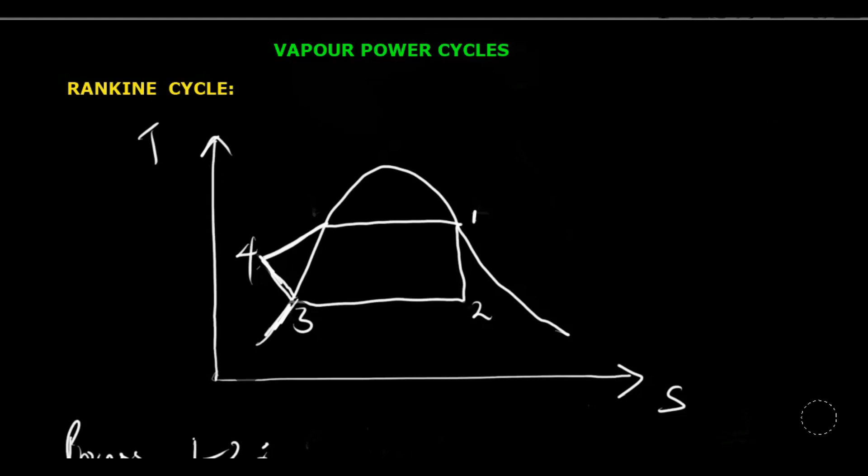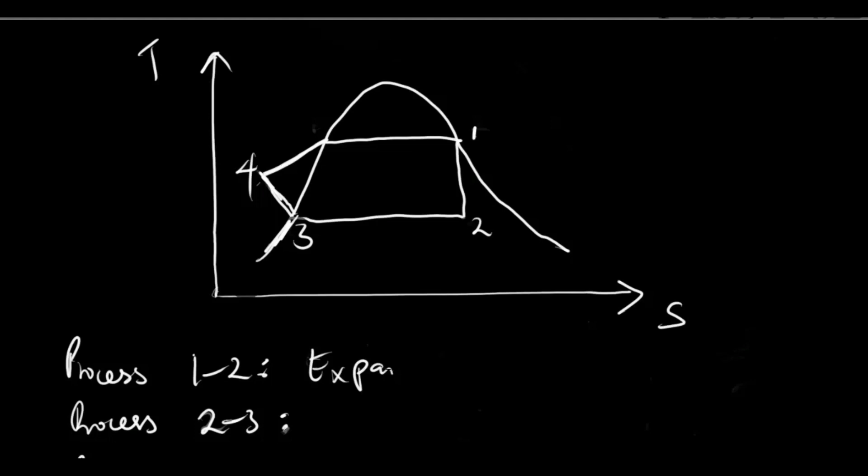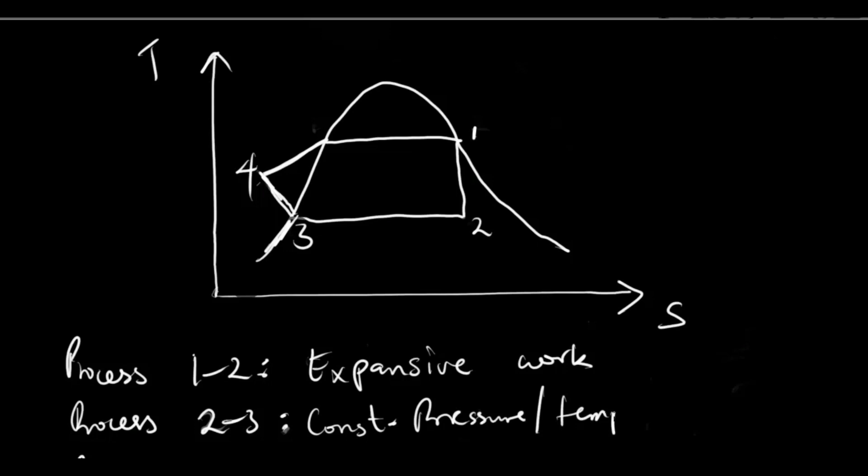So now let's go to the processes in detail. Process 1-2, that is the expansive work. Process 2 to 3 is the constant pressure and temperature heat rejection. Constant temperature and pressure heat rejection.

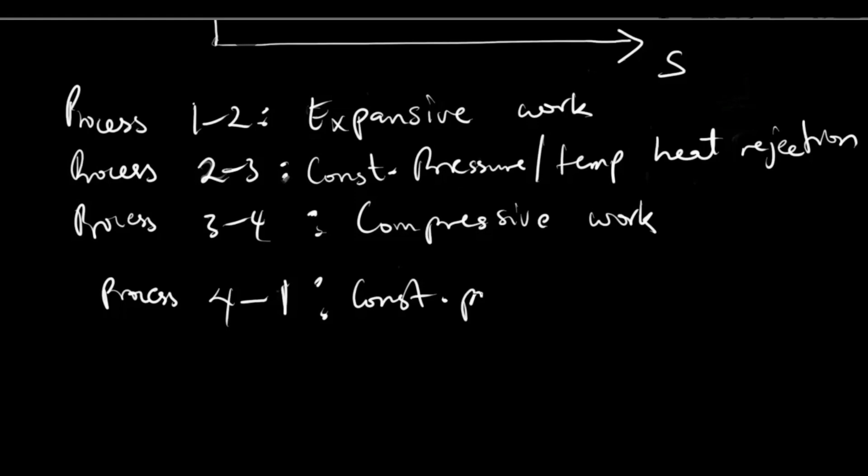Process 3 to 4 is a compressive work. Then process 4 to 1 is none other than the constant pressure and temperature heat addition.

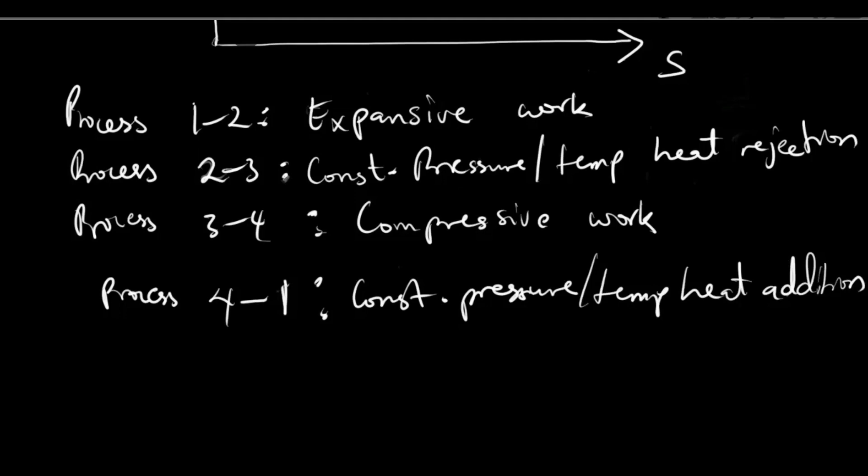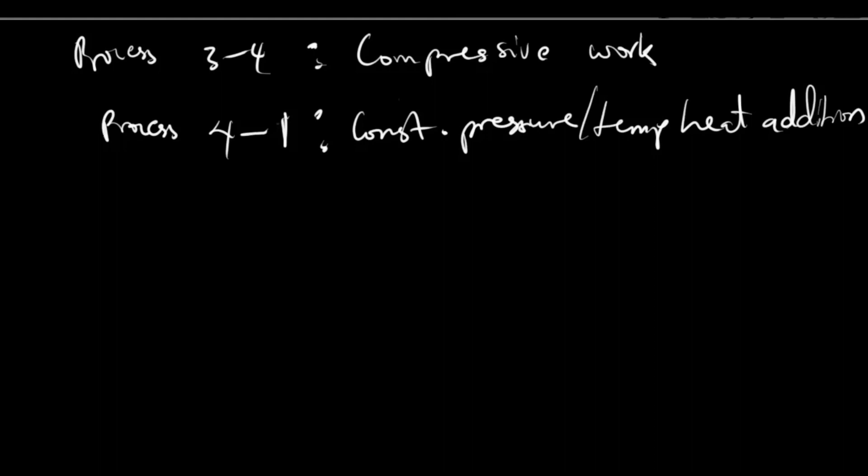Okay, now having stated this, we go straight into the formulas, though most of the formulas we have stated already in the Carnot cycle. But without mincing words, without wasting much of our time, let's still go over it shortly.

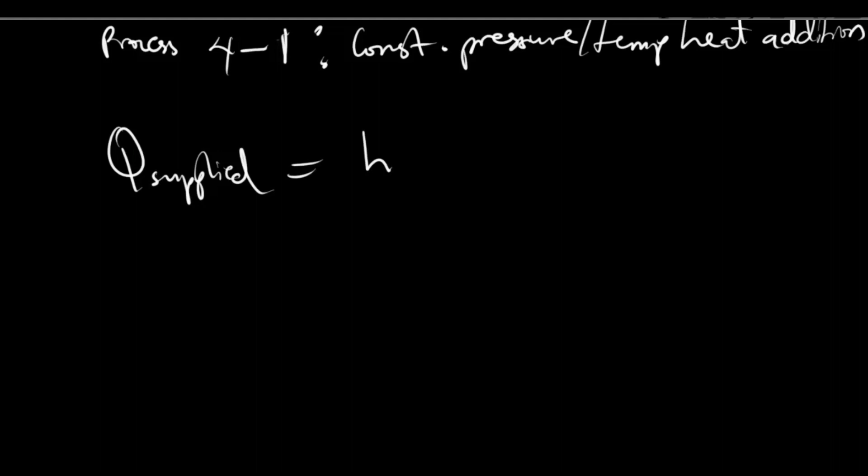So we have the heat supplied. The heat supplied QS is given by H1 minus H4, then Q loss is H2 minus H3,

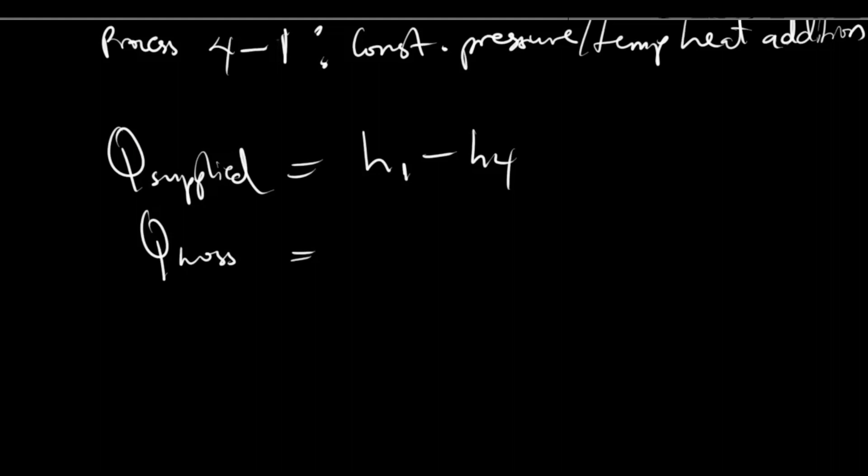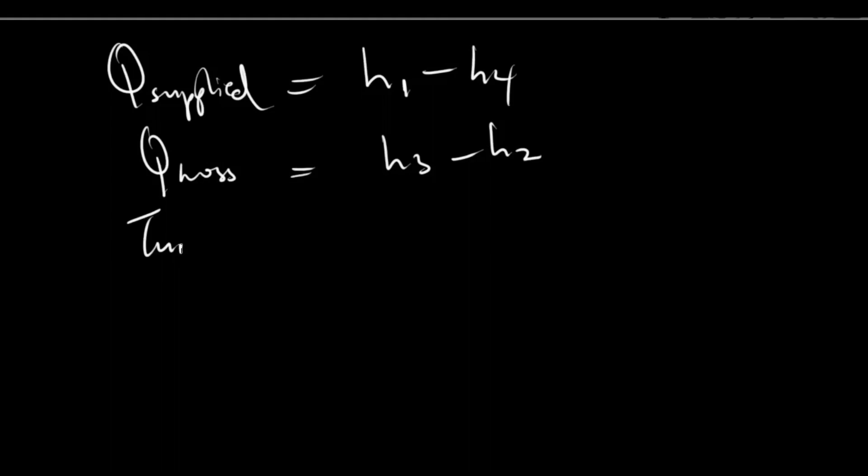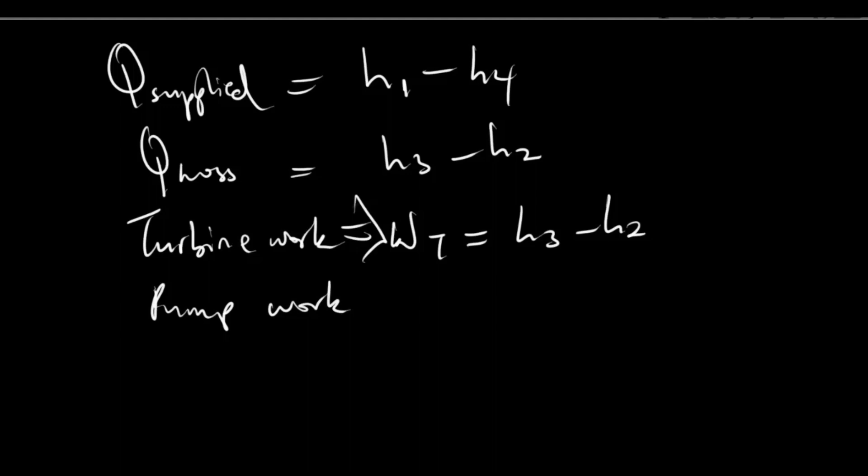turbine work, that is WT, the WT is equal to H3 minus H2, and compressive work or pump work, which is WP, is given by h4 minus h3. Rather, h4 minus h3. So this is what we'll be using.

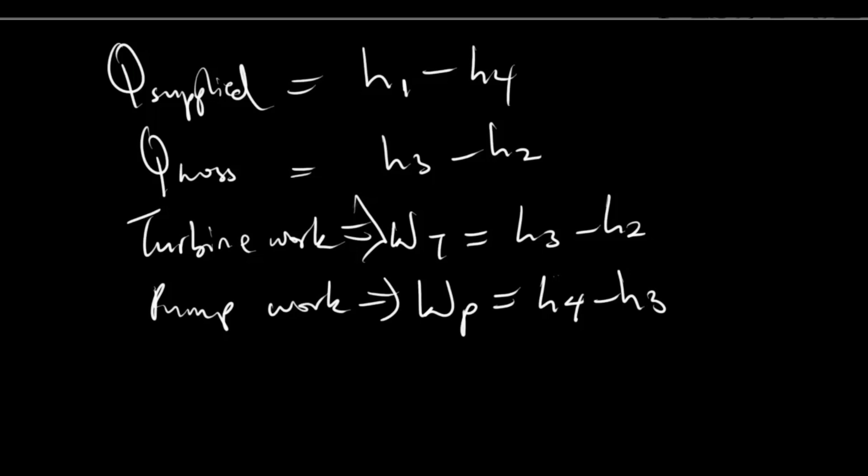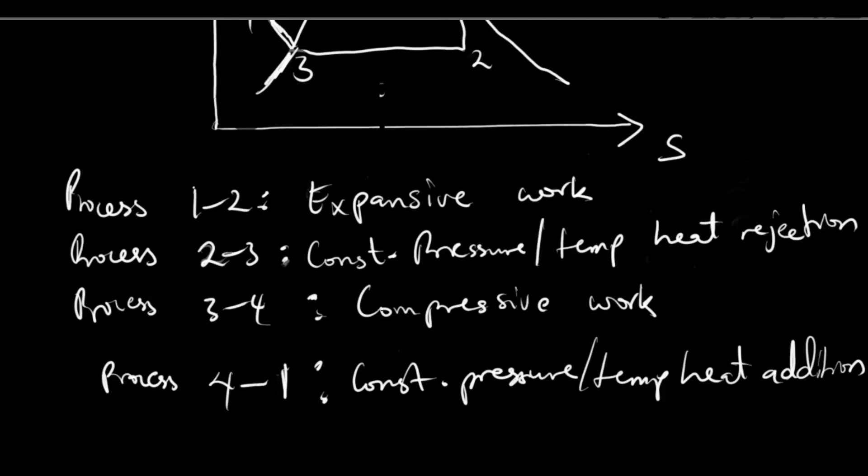Okay, now let's go down to solving a simple Rankine question that will help us understand these processes far more better.

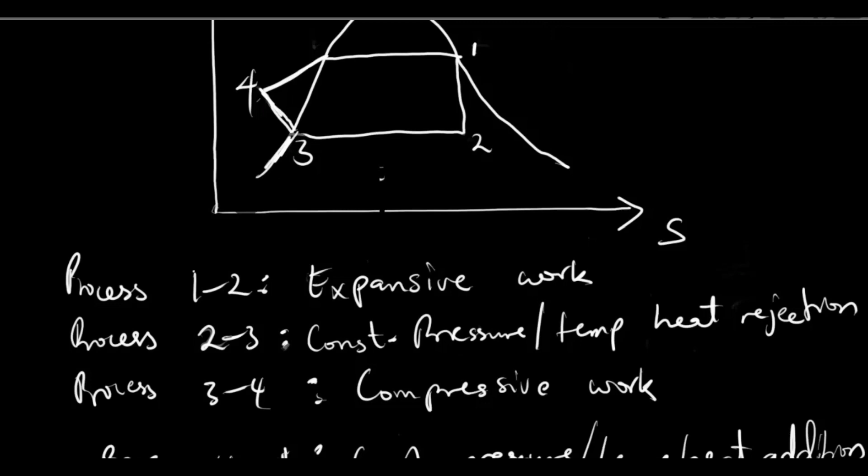So I go over here, the question. Now we have an example. Example 1: calculate the cycle efficiency, the work ratio, the specific steam consumption of a Rankine cycle working between 30 to 0.04 bar.

Now they say we should calculate. Alright, we are going to do just that. So firstly, remember, we start by writing our solution. So solution here, and our parameters given, though you don't have much of a parameter will be the graph. So we draw the graph.

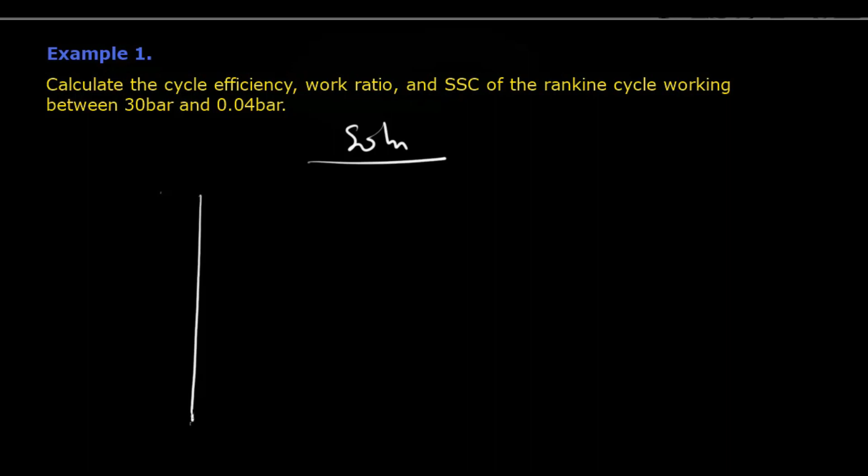There is the TS diagram, and the TS diagram goes this way. Alright, these are TS diagram. Our TS diagram is looking funny, so let's clean up this part and make it straight. Alright, yes, because it has to be straight. Okay, we have this. Good, so we have this.

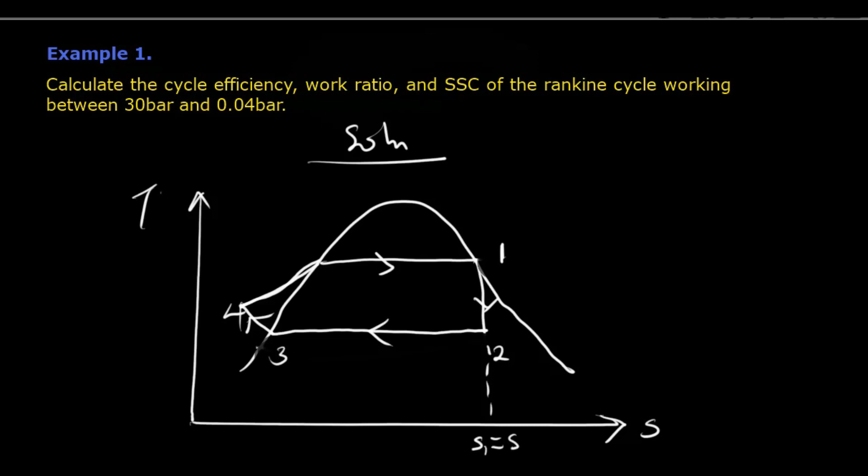So remember our numbering: 1, 2, 3, and 4. Okay? Yes. So don't forget, S1 is equal to S2. Yes, S1 is equal to S2. But S3 is not equal to S4, unlike that of the Carnot cycle.

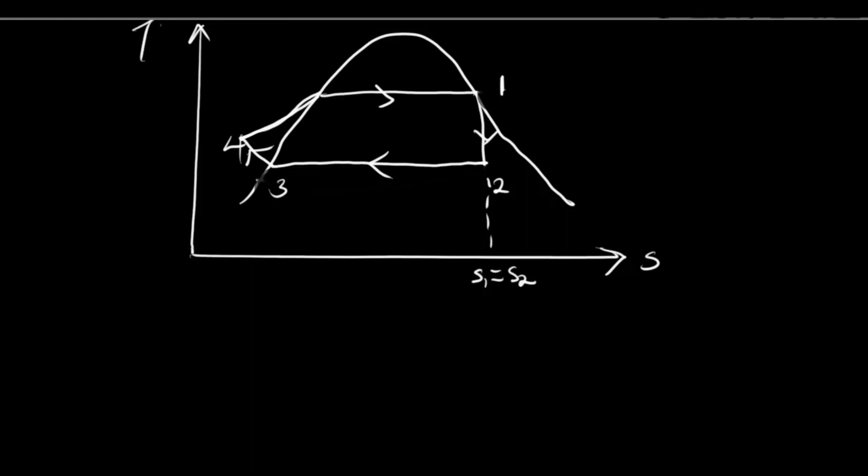So we are given 30 bar and 0.04 bar. So what do we do here? What do we start working with? Now remember, just like I said, here is the saturated liquid line, and here is the saturated vapor line.

Okay, and this superheated region, or superheat region. Okay, alright. Now,

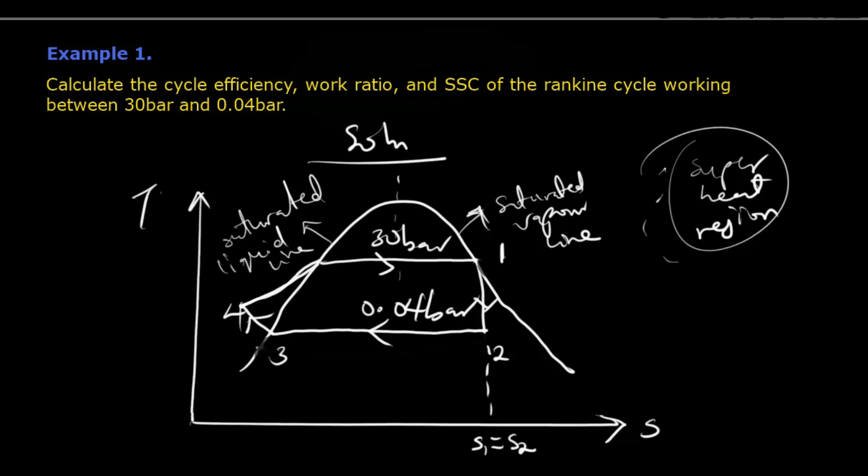First thing to do is to grab your steam table. Get a hold of your steam table and go to 30 bar. 30 bar on your steam table.

Now check the value of HF. Remember I said anything on this line, as you can see 1 is on this other line, so anything on this line will have a subscript of G, and this will have a subscript of F.

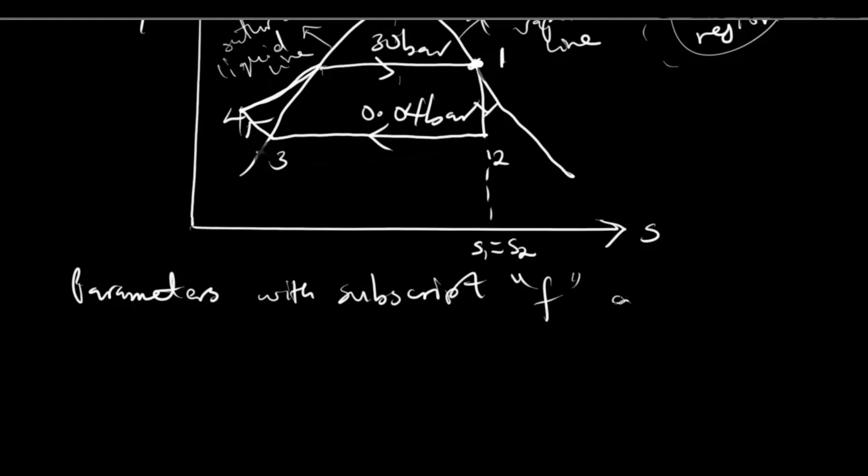Meaning parameters with subscript F are on the liquid, that is saturated liquid line, and those with subscript G are on the saturated vapor line.

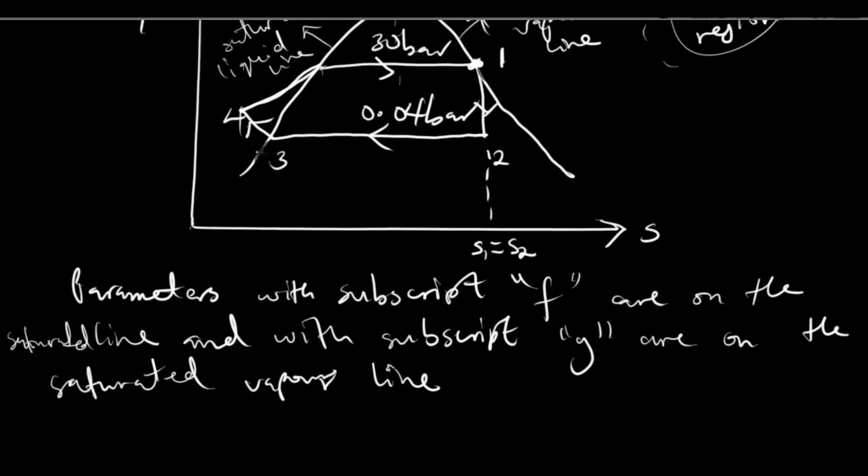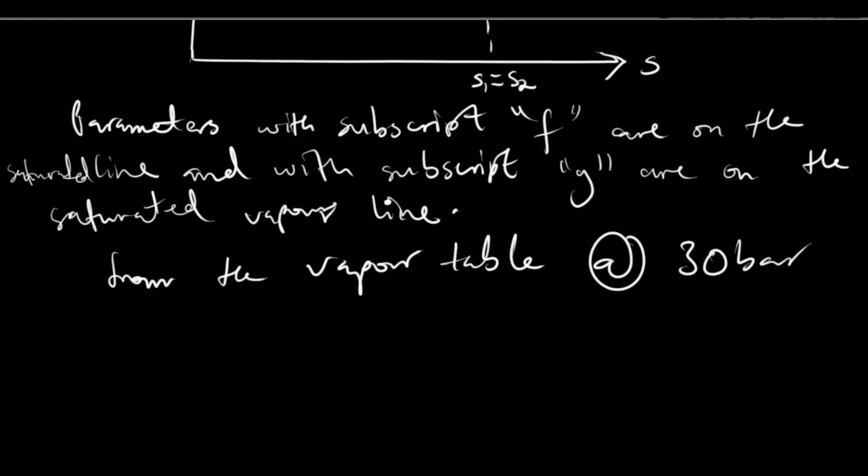So on your steam table, go to 30 bar from the steam table, and the vapor table at 30 bar. At 30 bar, H1 will be equal to what? Hg, which is equal to 1008 kilojoules per kilogram.

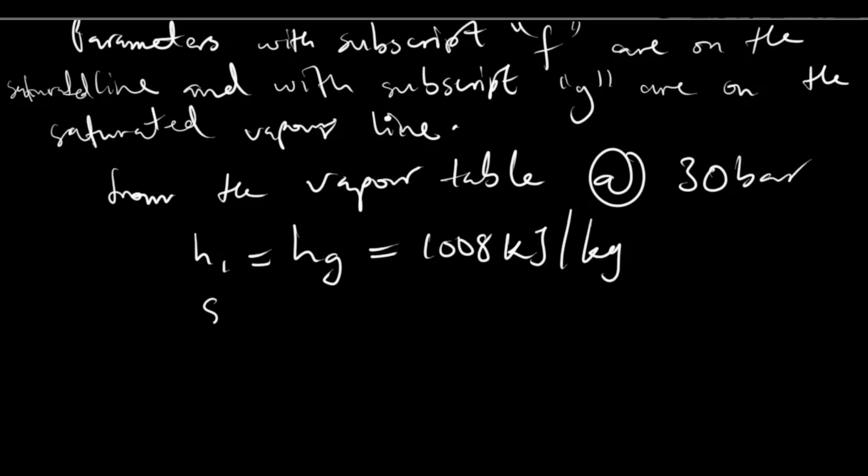S1 is equal to Sg, which is equal to 6.186 kilojoules per kilogram Kelvin. Alright, but remember that S1 is equal to S2, which is equal to 6.186 kilojoule per kilogram Kelvin. Okay, that we have over here.

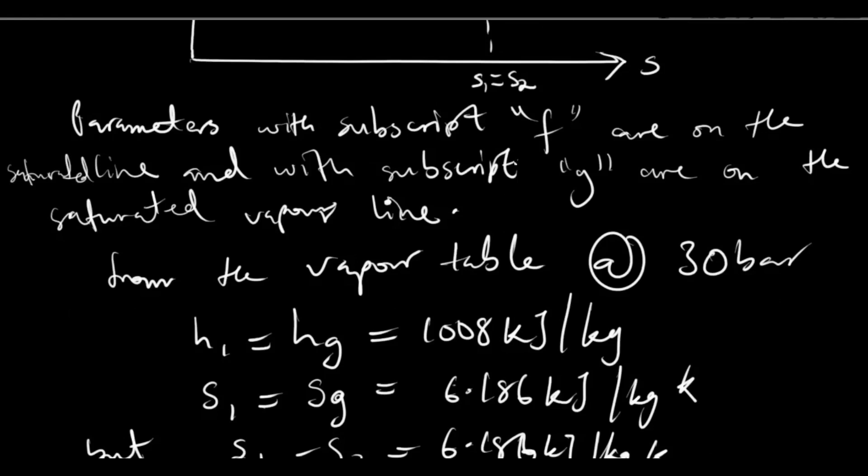So what do we do with that? How do we find the H2? We first find the S2. We first find the X2, that is the dryness fraction that will enable us to find it. So from this formula, SFG, so S2 we have the value.

So at 0.04 bar, you can see that at 2 the pressure dropped to 0.04 bar. So at that pressure, you go to the steam table, also go to that line, look at it very well, and get the value of SF. So from the steam table, the value of SF here is none other than 0.422 plus X2 into 8.051.

So doing the maths, we have that X2 will be equal to 0.716, rather, 0.716.

So with that, we can get our H2. Remember, H2, just like the S2, is given by HF plus X2 HFG, still at 0.04 bar. So H2, our HF is 121 plus 0.716 into 2433, that is HFG. So H2 finally is 1863 kilojoules per kilogram.

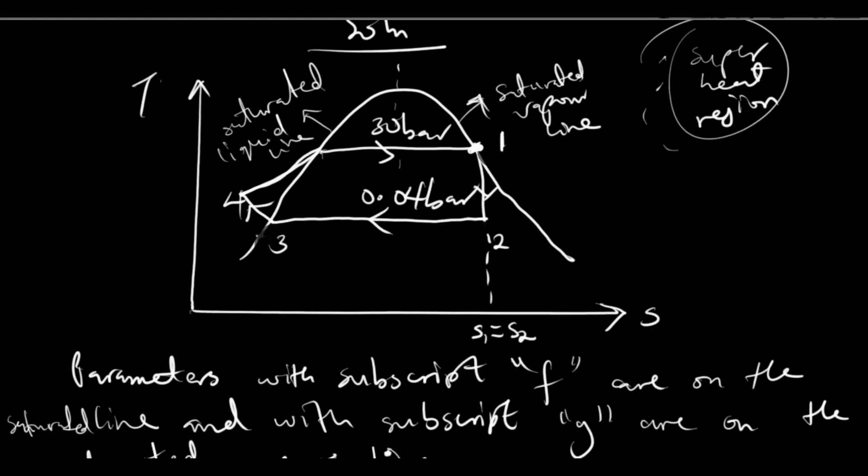Now the next is the H3. Well, you can see that the H3 is on the line, but which line is it lying on? It's lying on the saturated liquid line. So go to the table also. At 0.04 bar still, look for HF. Look for what? HF.

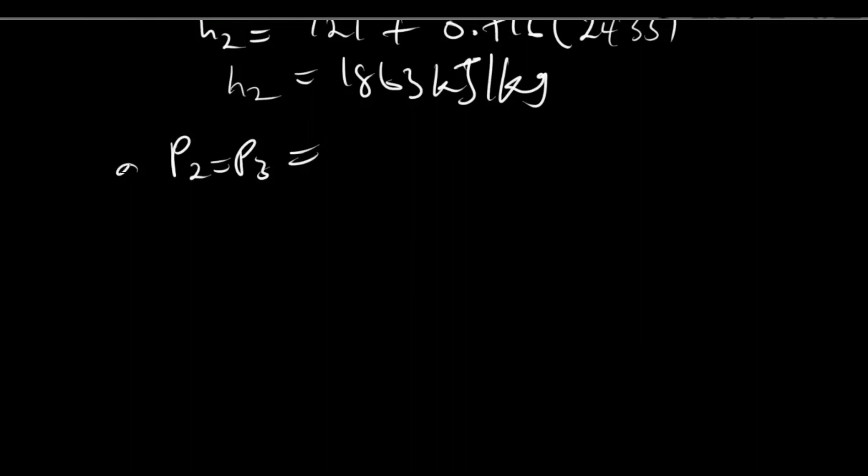So at P2 equal to P3, P equals 0.04. H3 is equal to HF, which is equal to what? 121 kilojoules per kilogram. Okay.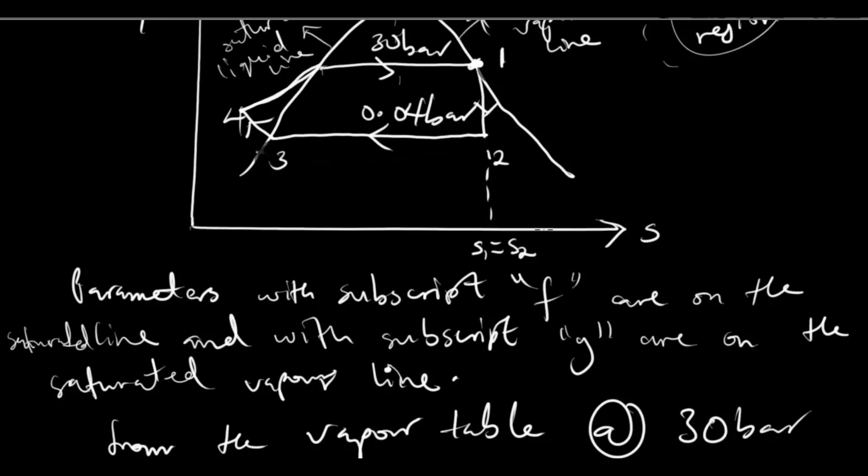Now, pump work. WP is given by H4 minus H3. Now which is work? Alright, but what is work? Work is what? P dV, that is P change in V. Change in V.

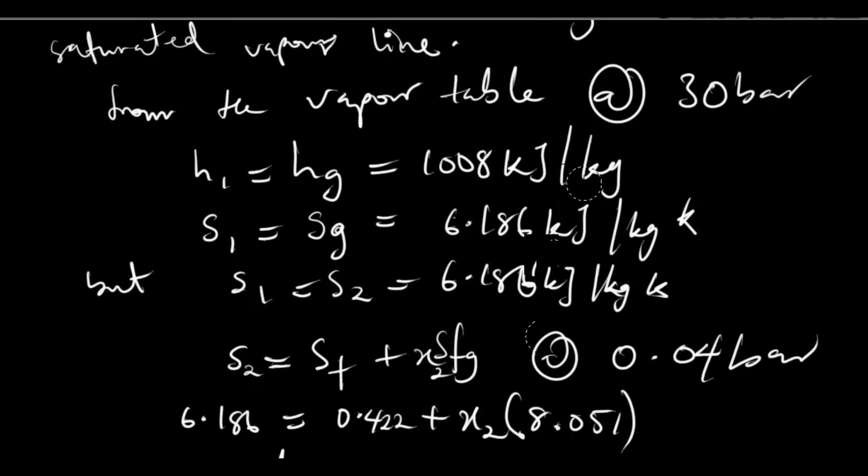So it can also be, since this is a constant volume process at compression, the pressure changes. So you can see that the pressure is at 30 bar and at 0.04 bar, so practically it's going to change. So instead of having P dV, we have V dP. So we have this P1 minus P4, yes. So we can say P4 minus P3, right? Yes, because P1 is equal to P4.

So P4 minus P3. They will bring this like. So P4 minus P3. Okay. Now H4 is VF times P4 minus P3 plus H3.

Okay, so the value of VF, you can get it from the table. If it's not in the table, it's usually 1 over the density of water, which is 1000. That will give us 0.001 into P4 is 30 minus P3 is 0.04, but remember it's in bar, so we convert to kilopascal by multiplying by 100.

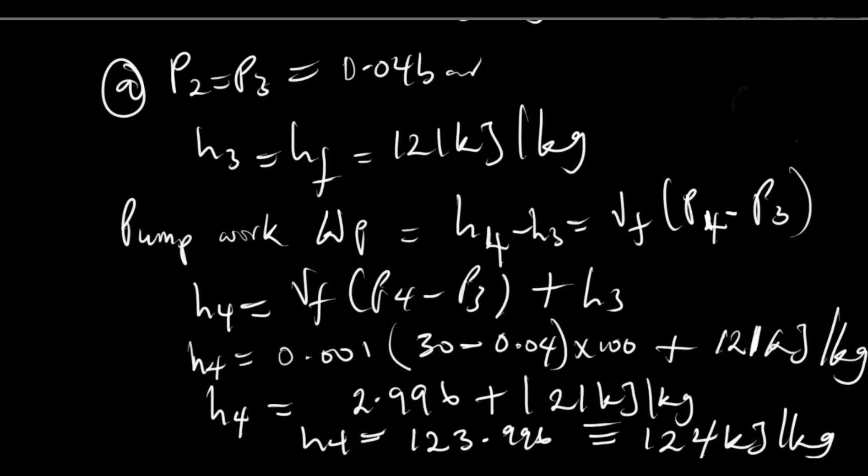The next thing to do is to find the cycle thermal efficiency, which we were told to find, the work ratio and the SSC. But before that, we have to find the heat supplied and the rest of them.

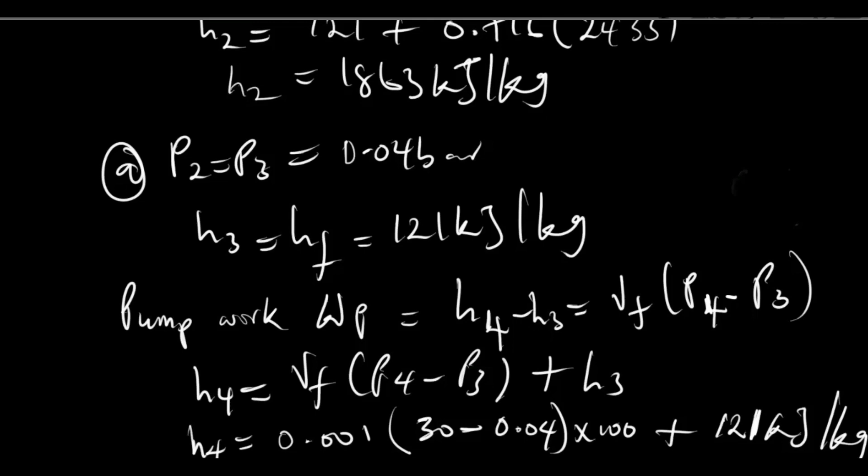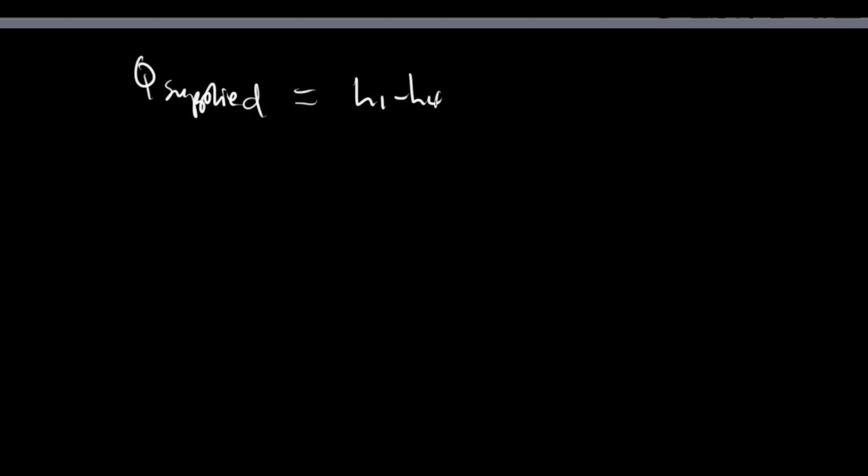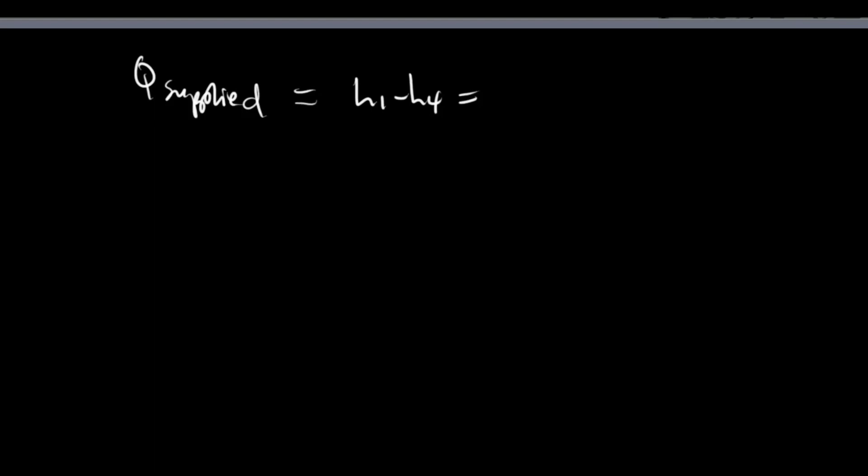So I'll open another layer. We have it over here. So heat supplied will be equal to H1 minus H4, which will give us H1 is 2803 kilojoule per kilogram. Oh, that's right.

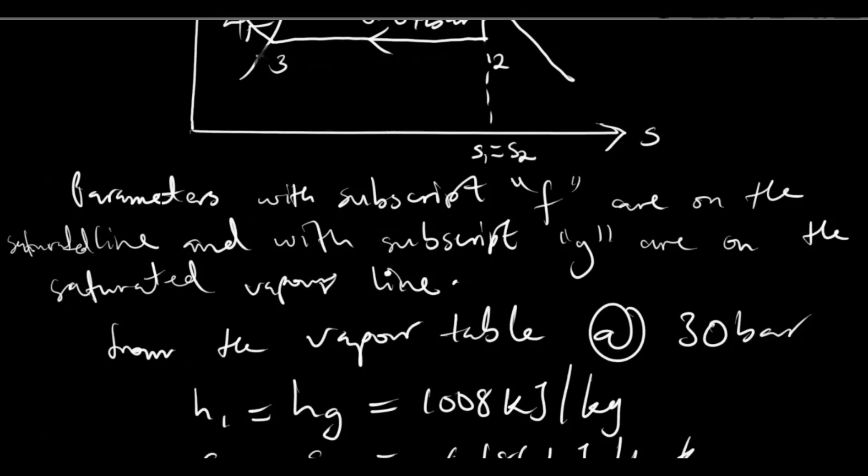Let's go back to our layer 2. Now, at 30 bar, our H1 was supposed to be Hg, but we took the value of Hf, so sorry about that. This is 2803. Yes, this is what it's supposed to be. Okay, that's what it's supposed to be.

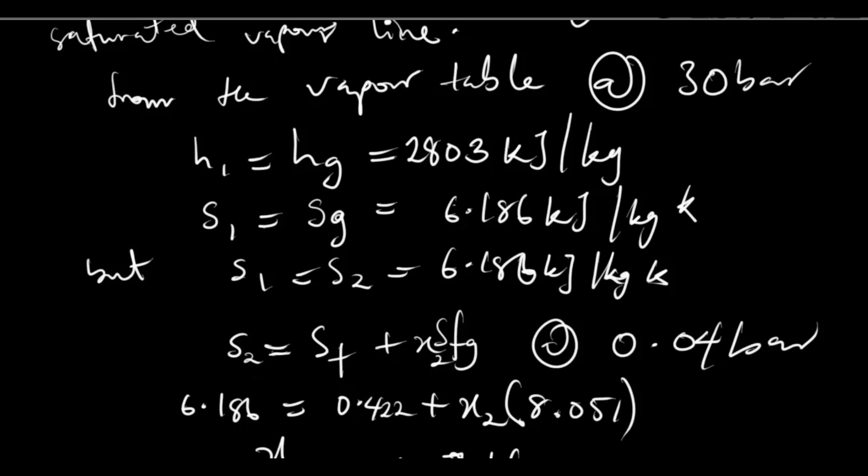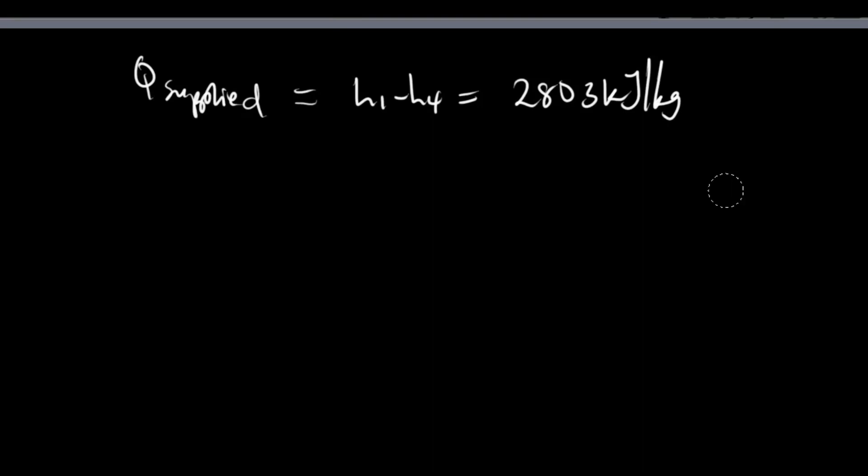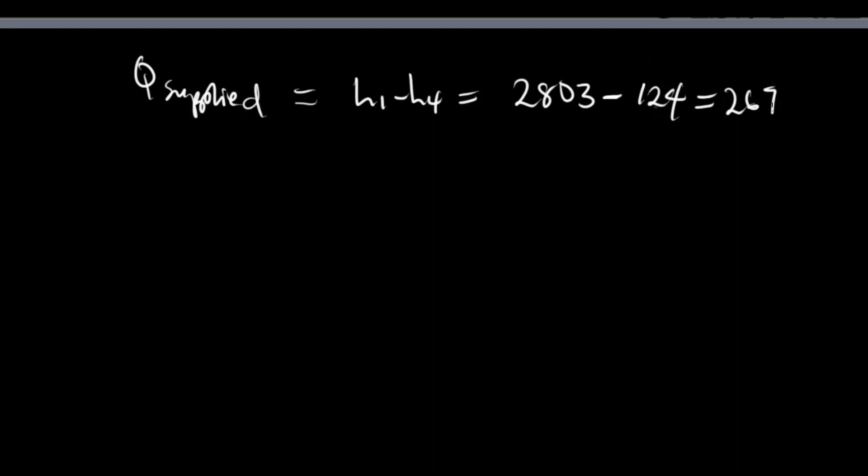Now we should go back to what we were doing. So it's going to be this minus H4, which is 124. That will give us what? 2679 kilojoules per kilogram. That's the heat supply.

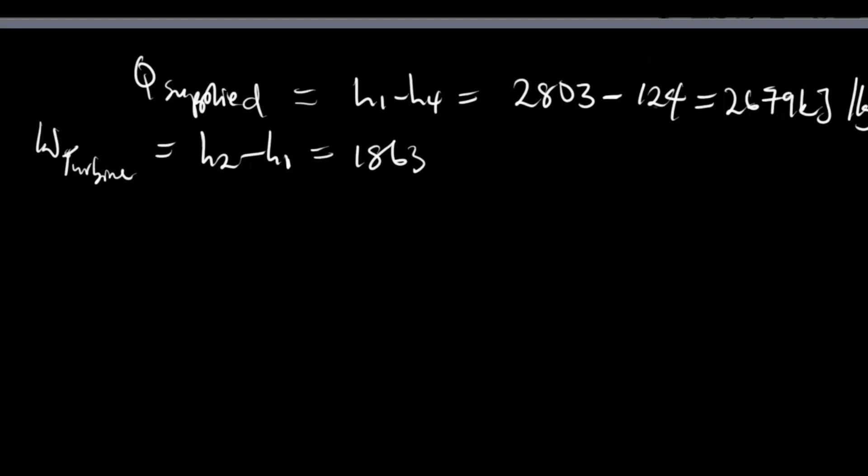So the next is the turbine work, which is W12, that is H2 minus H1. Okay, the H2 we got was 1863 minus H1, which is this, and give us 940 kilojoules per kilogram.

Now what's the next thing? The next thing is the heat loss, which is given by H3 minus H2. What was the H3 we got? H3 was 121.

Minus H2 is 1863. So if you do that on your calculator, you have that. If you punch that on your calculator, you will have 121 minus this, you have minus 1742 kilojoules per kilogram.

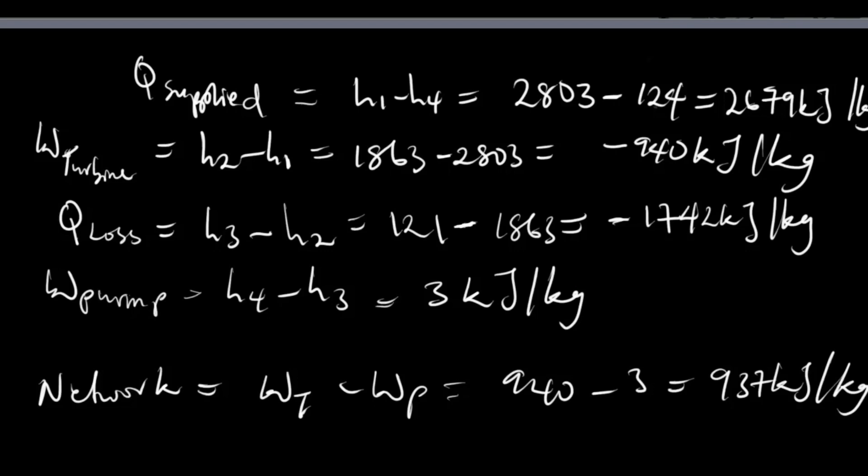So we go straight to the efficiency. The cycle thermal efficiency, which is network over heat supply times 100%. So network is 937 over heat supplied is 2679, times 100%. That will give us a cycle thermal efficiency of 35%.

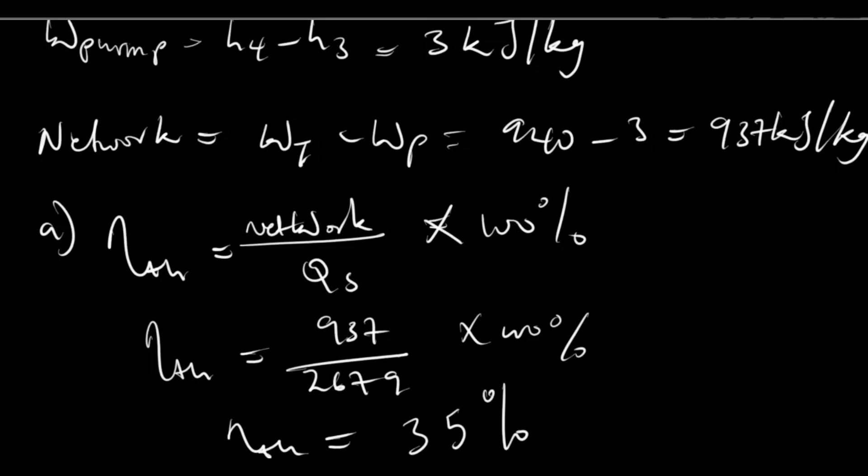The next is the work ratio. Work ratio, which is network over gross work, which will give us the network 937 over gross work, which is the turbine work. That will give us 0.997.

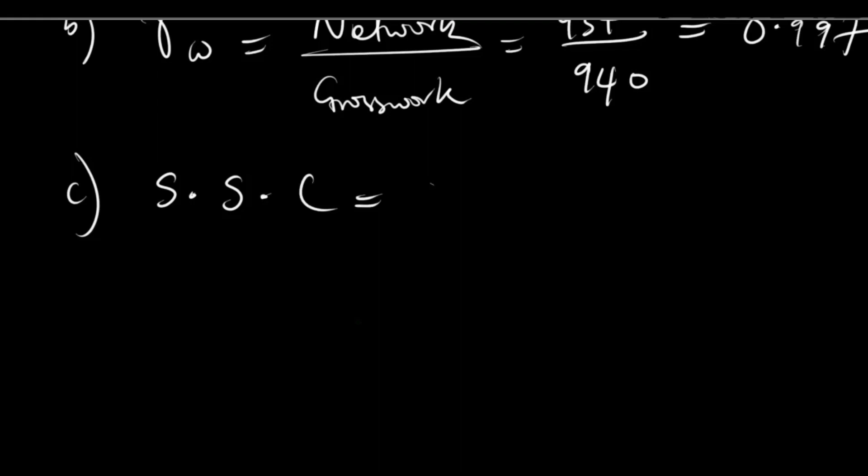The last but not the least, the specific steam consumption, that is the SSC, which is given by 3600 over network, which has a value of 3600 over 937. SSC will be a value of 3.84 kilograms per kilowatt hour.

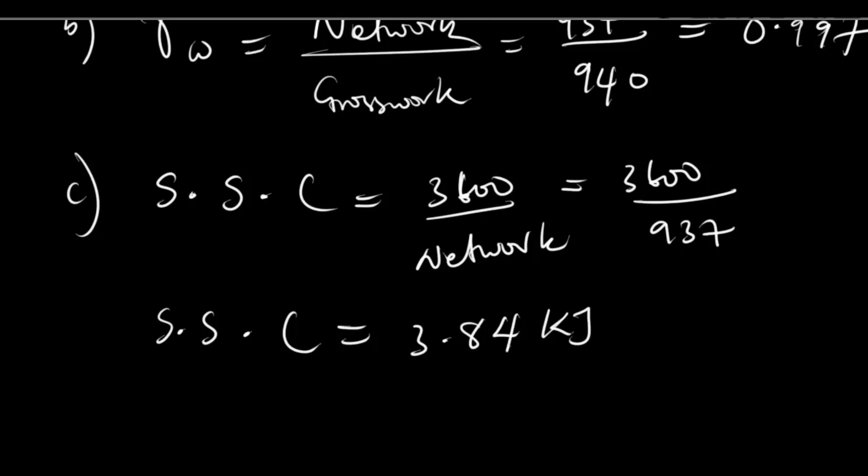Now this should be kilogram per kilowatt hour. Alright, kilogram per kilowatt hour. Alright, yes, that's what we have. That's what we will have, kilogram per kilowatt hour.

So now we have gotten everything asked in the question. The question says estimate the cycle thermal efficiency, work ratio, and the specific steam consumption. As you can see here on the screen, we have achieved that.

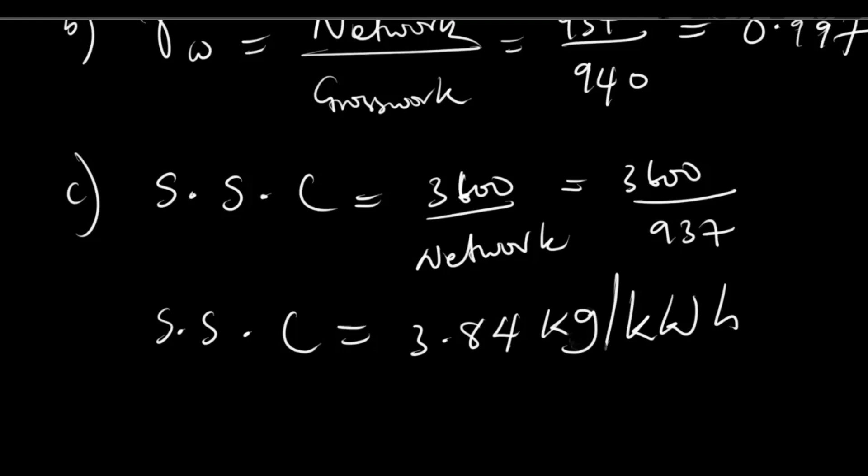So we have solved an example to help illustrate the process. As you see this, you should know that it's the same thing as that of the Carnot cycle. The only difference is that it has a smaller pump work compared to the Carnot cycle, and it doesn't have the same entropy at the expansion and compression processes. So that's just the difference. We have solved the question to help illustrate that.